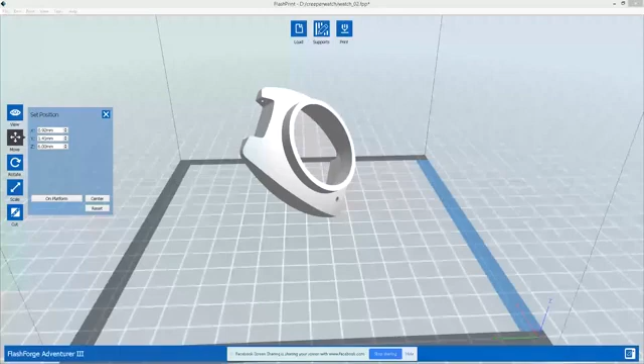All right, so I've got two models that I want to demo today on making supports. One of them is this watch face from Tiffany, and the other one is a Han Solo bust from Helios. So we'll do this one first. The watch face is pretty simple. The program I'm in at the moment is FlashPrint, and I've done heaps of streams and tutorials on this program already. So if you just click on my name in the Facebook group, you should be able to see the past stream recordings.

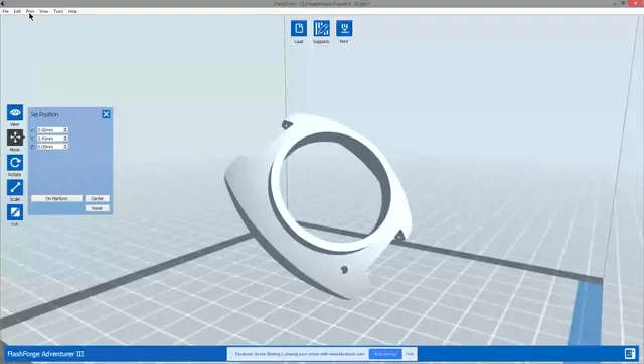But yeah, so I've already spent 5 minutes just looking at the model and then just doing the orientation. So this is what I came up with. But to get to that, I'm just going to load the model and then I'll just move that one out of the way.

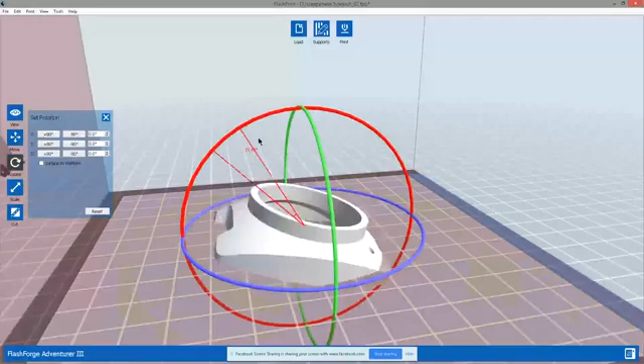All right, so in FlashPrint, there's a few really good features that will show you visually things you need to be aware of. So the first thing, obviously, is steep overhangs. So you see this red part on the model, that's basically telling you it's over the overhang threshold, which means you'll need to add supports. And you can change the, it's called the steep overhang in the view section. And you can set the angle that you want it to display. So set it to 45.

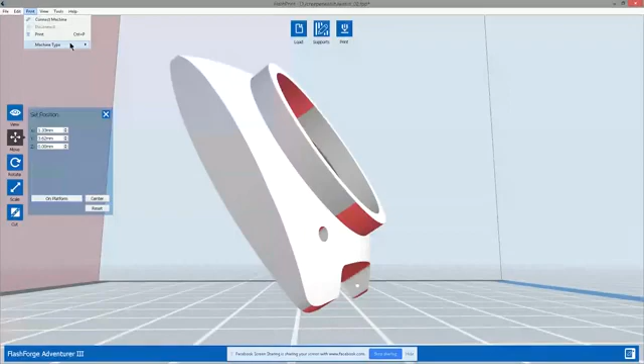So I found, on the Photon anyway, if you're printing a model that's sort of growing by itself without too many islands, a 60-degree setting works quite well. So when you're orientating your print as well, you want to basically grow the model from itself. So right now at this point, the model is going to grow from these two areas, and somehow it needs to sort of join up perfectly. So if it doesn't, then you'll get misprints.

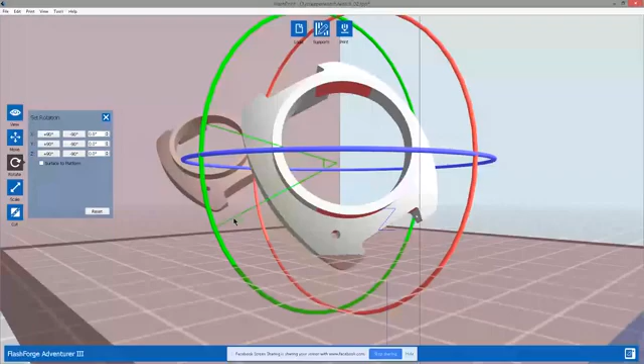Whereas if we just simply rotate it like this, it's just going to have the one contact point to grow from. Just makes things a bit easier. Obviously, you're still going to have islands here that will need to match up, but yeah, that's just the way printing works. But to minimize the problem of failed prints, it's best just to grow from a single point. So I'm going to delete this one and then bring this one back.

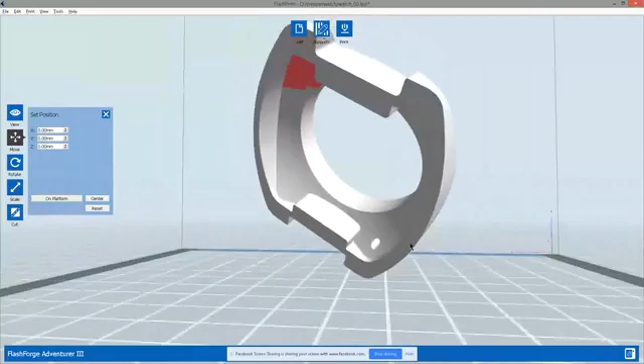So you can see in here, there's pretty much no overhangs that are over 60 degrees besides this area, which is pretty awesome because that means you won't need a whole bunch of supports all around the perimeter. So whether you do your supports in FlashPrint or some other program, the orientation of this model will still work. But I'm just going to do the supports in FlashPrint. And I'm using tree support. And I've got the overhang angle set to 60 like the preview. You can set it to something lower if you want. Let's do 55 just in case.

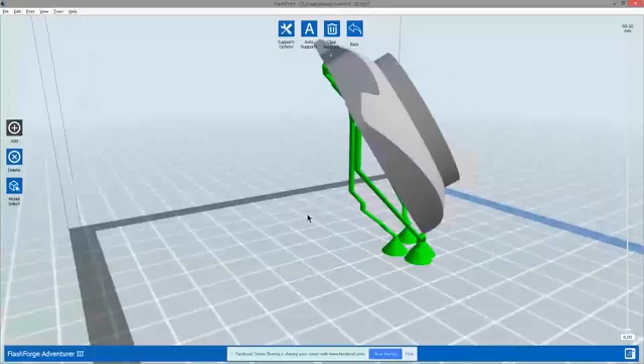Now you'll notice here the base height is set to 4 millimeter, which means we want to move the model up in the Z. So 6 millimeter, so a 2 millimeter gap works. I'm going to hit auto support. So yeah, that's with the tree-like auto support. It's not too bad, but there's a couple of things we can do to just mitigate any sort of weird printing issues, such as the supports snapping off around here. So the angle is just a little bit too steep.

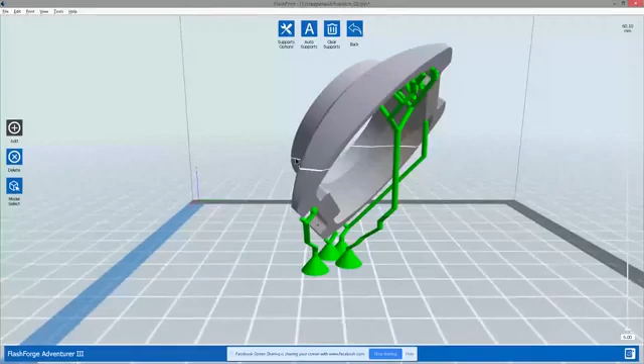What FlashPrint likes to do is put the base from a single point, just like I explained with the orientation. It just helps with the printing, but in this case, or in most cases, you'll want to just add a bit more structure to these. So you can see it's also added in these tiny little supports here, which should be fairly easy to dig out, but for this particular print, you won't need it. It's such a small area, it should just build on itself fine.

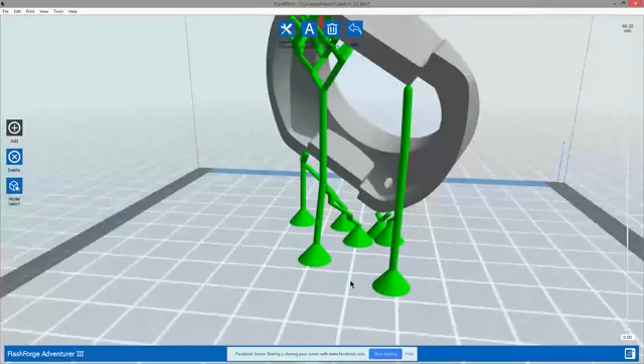So I'm just going to add a few more manual supports, going to the base. And you want these to be as straight as possible. So it may take a few tries. Now, obviously, if you look at this whole section up the top, it's going to be dependent on these supports working. And these supports all depend on this one single branch support. So that's a big no-no, because if this branch fails in any way, then all this up here is not going to print. So we'll just want to add a few more. And try and make it straight if you can.

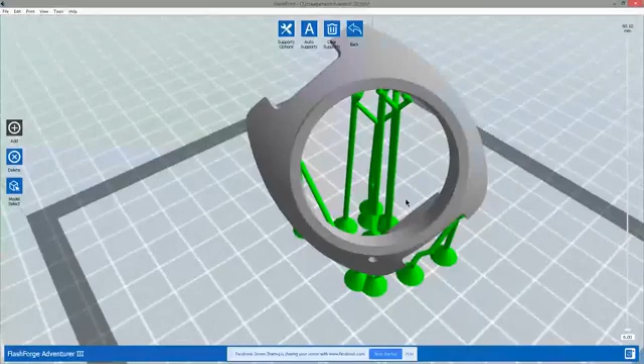So I should mention FlashPrint is a free program which you can download. Just Google FlashPrint. Yeah. Supports all the operating systems now, which is pretty good.

Hopefully the internet's not lagging too bad here in Australia. We're known to have really shit internet. You can see what I'm doing.

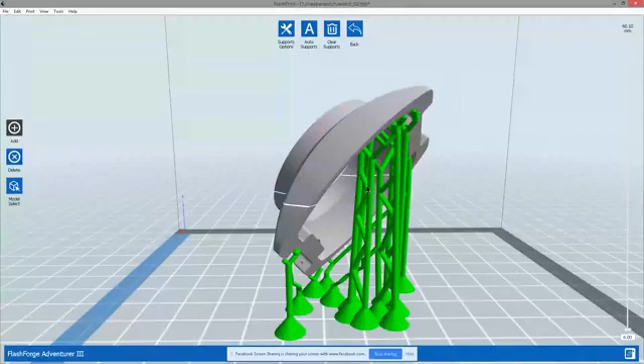So once you've added the extra sort of supporting supports, we can go in and manually add these struts to help the support even more. These are kind of fun. Just make sure that, you know, these critical supports here don't wobble or snap off. Just like building a high-rise. That's pretty good.

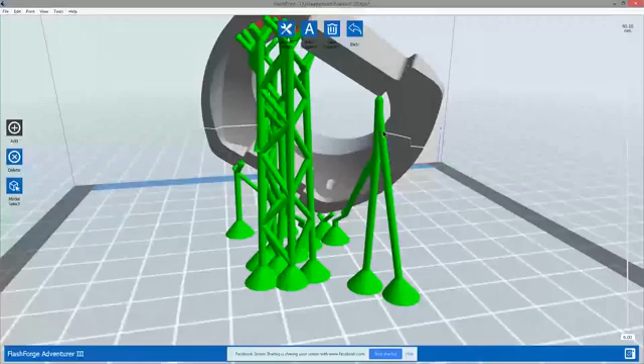So this little guy here should be okay, but once again, you're depending on this main structure to work. So let's just do this. Yep, that's fine. And you can see I can, you know, go in and delete and Control Z and undo and all of the normal stuff that a program should have.

No, it's probably not you, Tiffany. It's probably my internet here. The hamsters are running really slow today.

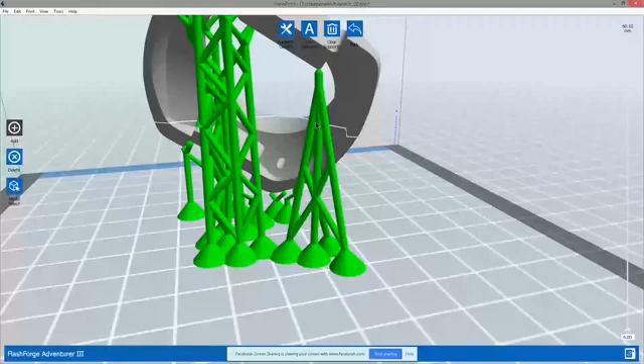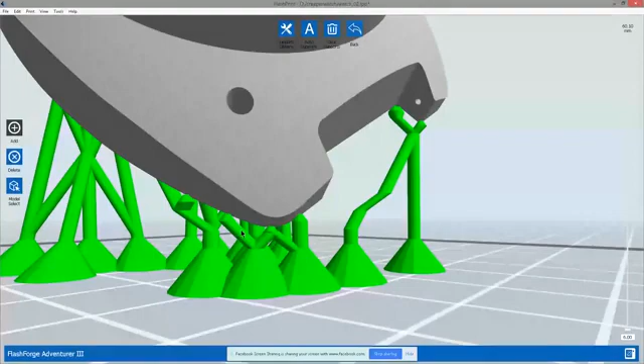Okay, so we get to the critical part where the entire print is going to be spawned from this section. So you want to make sure that this particular area is as well supported as possible. Just means though you will need to have additional cleanup just down in this corner. So try and avoid letting FlashPrint do harsh angles like this. It'll be fine, but if you can avoid it and give it extra support, then by all means do that.

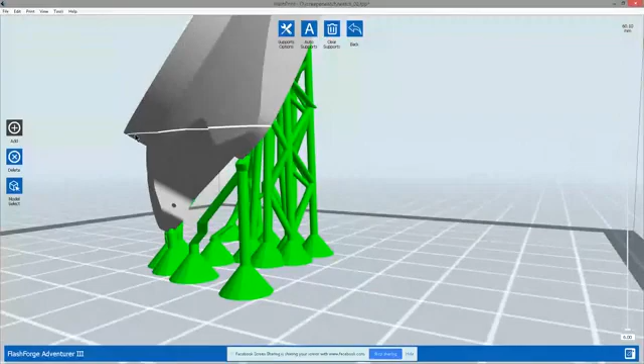It feels like I need to put in a support here. You can risk it and not have those. I think it's worth it. Again, same deal here. Just make sure that these are well supported.

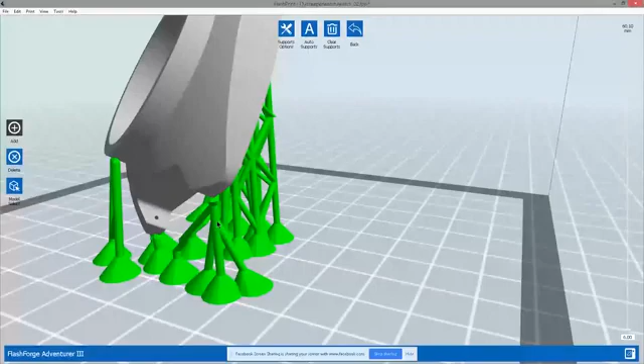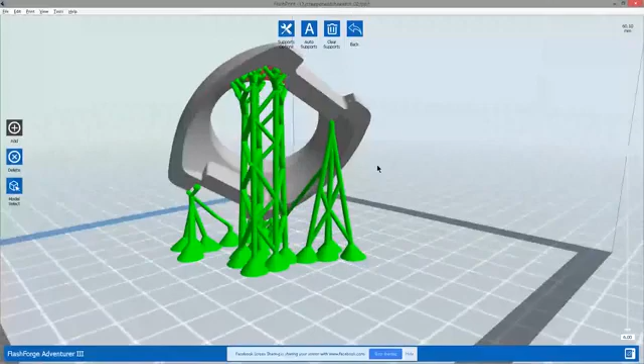So this whole section is obviously going to be dependent on this tiny little support here not failing in any way. So you want to make sure that, yeah, that's not going to fail. Give it a helping hand. I think that's looking pretty good. So one thing as well with FlashPrint, you can actually go in and do like a cross section as you normally would in like an FDM printer.

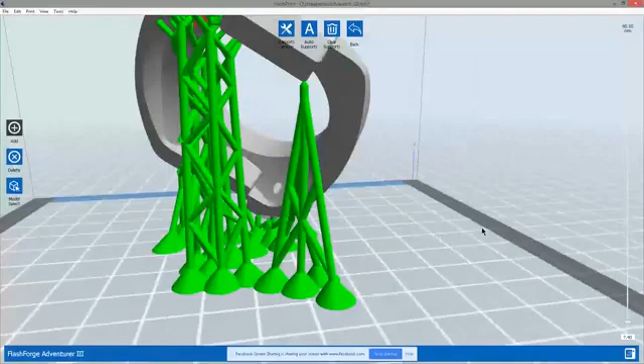I see Chitu are actually releasing a new version of the Anycubic Photon slicer, and that looks like it has a bunch of brand new functions and tools to help with supports. Looks really good, to be honest. So hopefully I won't need to use another program like FlashPrint to do supports anymore. Can't wait to try it out. Looks really good.

So I'm going to call this done. And then I'm going to send the file to you, Tiffany, and you can give it a try and tell me whether it works or not. I mean, it looks like it should print, right? So I'm going to slice this and then throw it into the Photon validator, and we'll just have a quick look. So let me just save this working project.

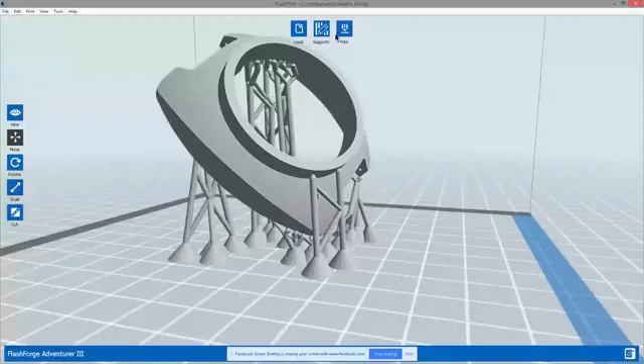So yeah, this is obviously the minimal support possible to get the file printed. If you want it to be more safe, you could add just supports like this. You don't obviously have to cover everything with supports, but even just one or two around the side will help. I'm just going to leave it at that for now.

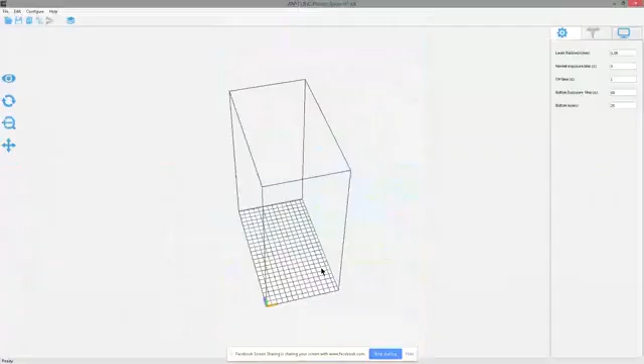And I'm going to save this out as STL. So you need to change the format down here to STL. Otherwise, you're just saving it as a FlashPrint project. That's fine. It's just saying it's going to bake in the supports to the model. So I'm going to slice this at 0.05, and you can change the exposure in the validator anyway, so I'll leave that part up to you.

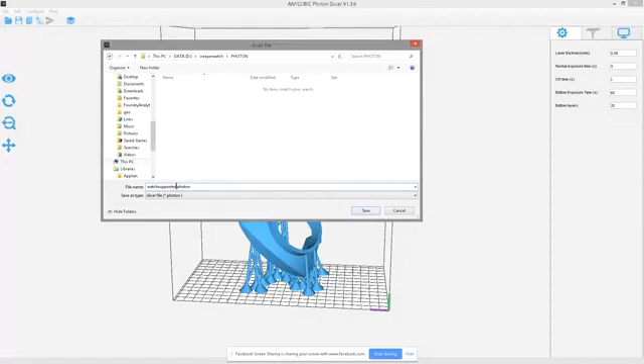I'll give it a quick once over. It looks fine. And just force of habit, I just remove any weird characters, underscores in my file name. Just use letters. So around 4 hours, the slicer is telling us, but we all know that's incorrect. So we need to bring that into the validator.

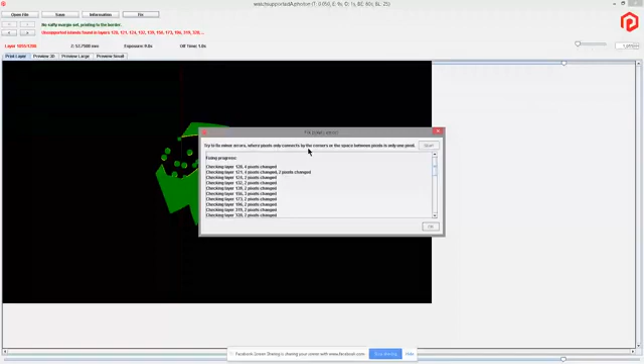Now, these single pixel errors aren't really going to affect your print that much. But hey, look at that. It's actually fixed everything. So no layers have islands. Job done. And let me just hide this. Scroll up. Always double check this before I save it and hit print just to make sure things are growing properly.

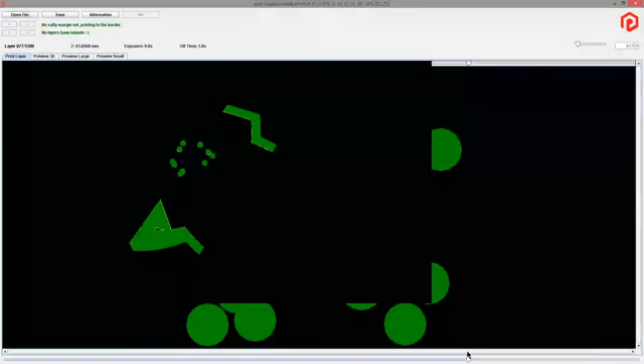Not sure what this hole is. It's weird. What are these holes here? I didn't see them in the model. Ah, these things. Alright. Did they go all the way through? Oh no, they just sit inside in the solid model. That should be fine. You will get sort of little suction vacuum issues, but the hole's so small, should be okay.

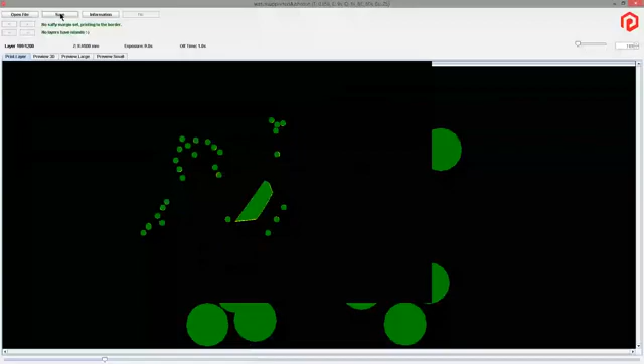So that's all good. So I'm going to save the file. I'm going to call this fixed. And Tiffany, I will upload this for you, and you can use a validator to change the exposure time to whatever your resin's using, and just resave it. It should be good to go. Let us know how it goes after the printing. Hopefully it all goes well.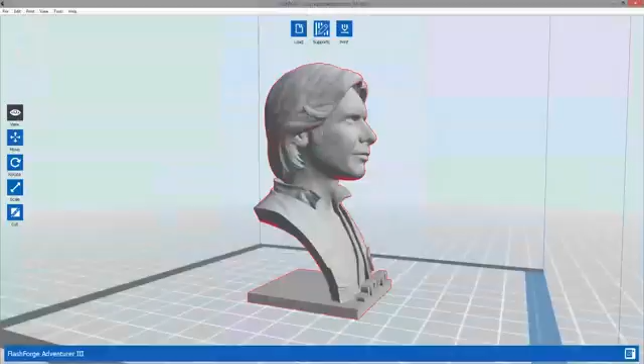So the model is not hollow. I don't have time to. Well, do I have time to do the hollowing? Let's have a look. We'll see how complicated it is. So I'm using Meshmixer for my hollowing and keying. All right, Helios, this one's for you, buddy.

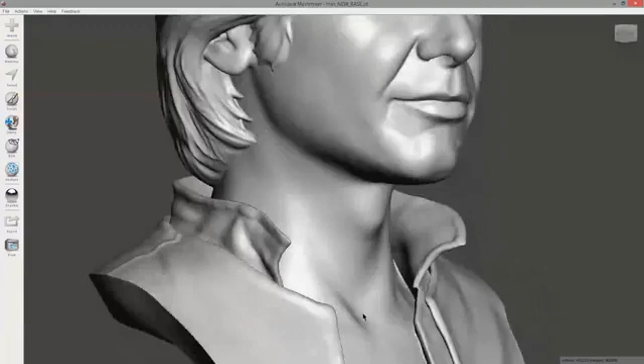Yeah, so just looking at the model, these tiny little overhangs inside are going to cause issues with printing. So it's a nice model, but it definitely hasn't been sculpted for optimal printing. So you probably just want the little gaps in there to be half of that, and then the rest is just a solid model. So we're going to have difficulties hollowing this, I would say, but let's have a look.

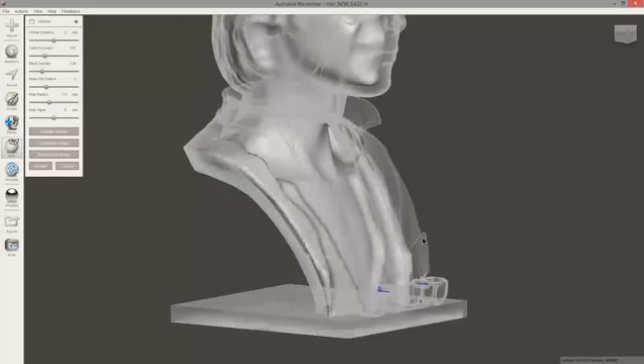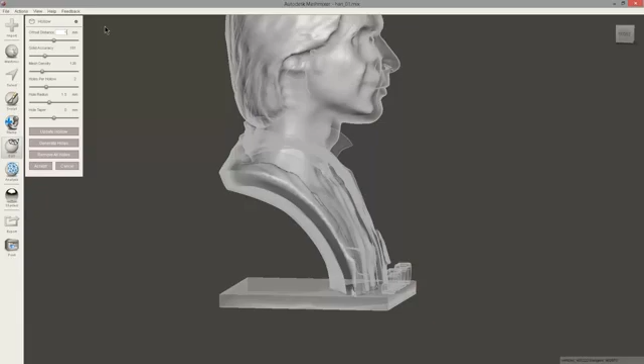Yeah, so it's already picked up some errors in here. So first things first, let me just run a quick model inspector. Let's see if we can fix these little errors. It's done a pretty good job. Excellent. So it looks like the vertices weren't merged together on those particular parts. Alright, so edit and then hollow. I'm going to set the offset, which is the thickness, to 1.5 mils.

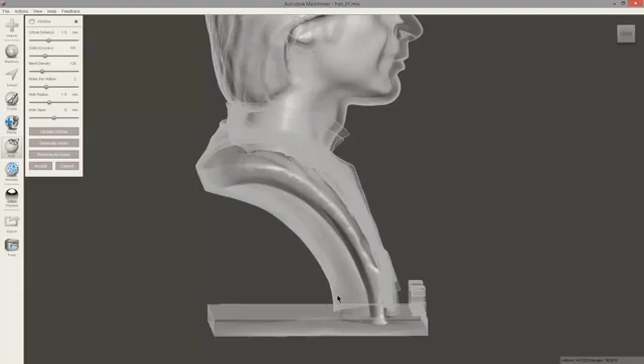So that's not too bad, but with this particular model, if we hollow out this particular section here of the base, it's going to create some bad suctioning, and I don't want to put holes down the bottom here for venting. So this is going to be quite advanced, but what I'm going to do is just save this hollow, split it out, and then cut the inner hollow to just above the neck, so we just get a hollow section for the head.

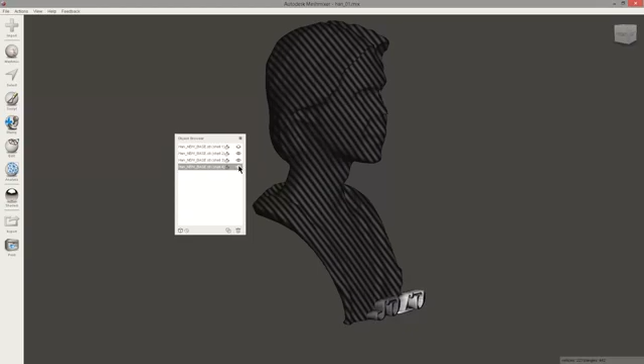Yeah, okay, so these words are separate. They haven't been modeled into the bust. So what I'm going to do for you, buddy, I am going to not print these words out just to make sure that your print is going to work properly.

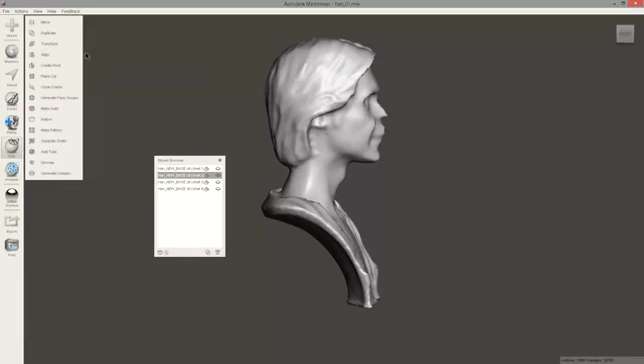So we're looking at the inner part of the model, and it's got the stripy texture to it. It's because the normals are flipped. So if you want to work on the model, you need to make sure you flip the normals. And that's all good. Okay, so what I'm going to do is now slice this. But yeah, you've picked a model that's pretty sort of tricky to print here, Helios. But that's fine.

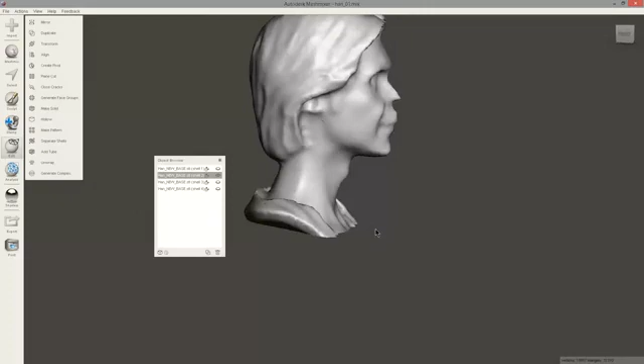Now what I'm going to do next is just smooth out some of these weird overhangs and cavities, just to make sure no resin gets trapped inside. When you're doing this, be careful that you're only pushing in, deflating the model, and not inflating the model, which will make the walls too thin. So that's why I use a 1.5 mil thickness.

These programs aren't 100% accurate, so anything lower than a 1 mil thickness of the walls and you start running into issues. So again, just pushing these in by smoothing them out, just so there's no weird overhangs.

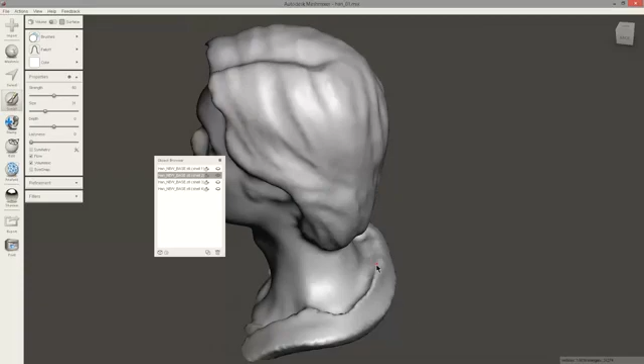You don't have to do this, but it's just me wanting to make sure that things print out properly. And look, if you spend your time doing all this stuff, you don't end up wasting a bunch of resin, and your prints come out nice the first time. So that's all right. Just gonna run the mesh inspector again. Just make sure there's no weird holes in this. Okay.

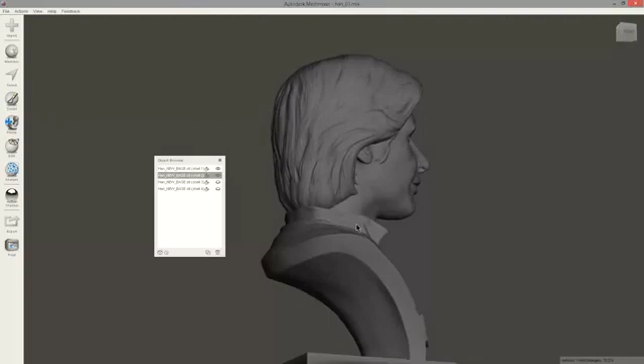Okay, so this is the inside, and then we've got the outside. So the next thing I need to do, the critical part, is to add a vent hole for air to go in as the printer prints this top section. Without that vent hole, you'll have just a vacuum inside the volume here, which is going to cause you all sorts of problems.

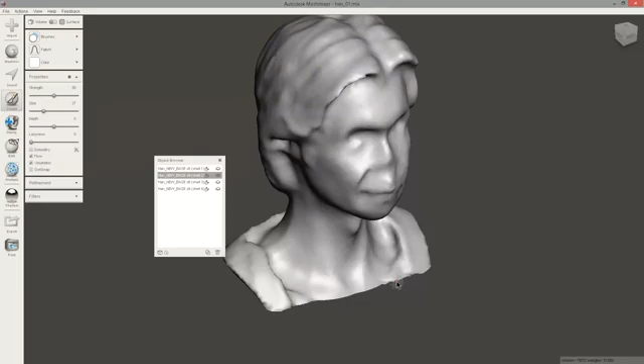And actually I might just smooth this out, sorry. Not really a fan of what's going on here. Should be alright, I guess. It's on the inside, so I just want to give it some thickness. There we go, it's a bit better.

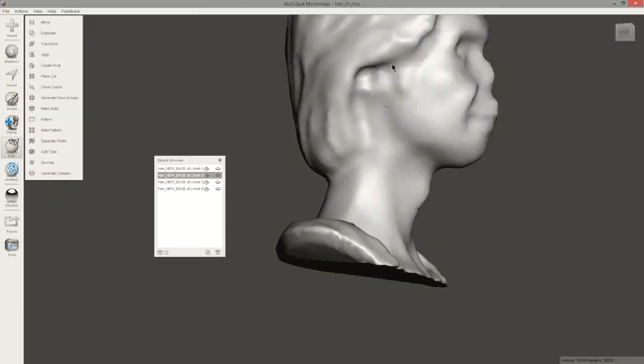Okay, so what I'm going to do now is to add a vent hole and then merge it into the inner part, and then subtract the entire inner part from the outside part, which will make a cavity inside the model with the vent hole as well. So in here, there's some generic primitive shapes, and the cylinder works quite well as a vent hole. So we'll just drag and drop that into this section.

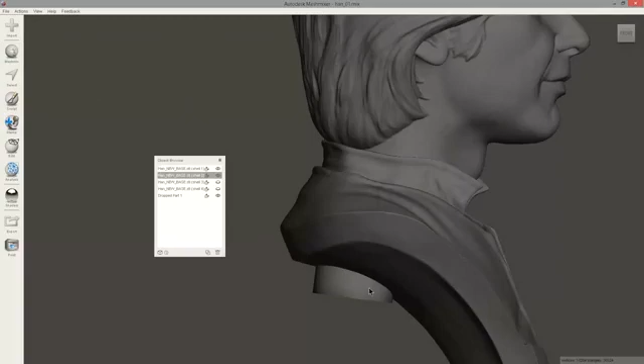You want to make sure that the part isn't going through the model like that, and you also want to make sure that it is long enough that it cuts out through the actual front side of the model as well. So we're essentially cutting out this section from the outside. Hopefully that kind of makes sense.

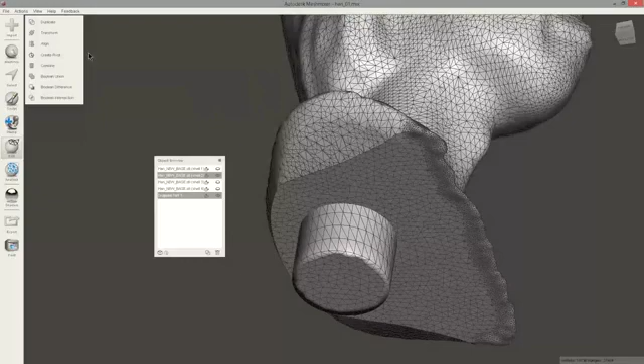But before we can do that, we need to combine these two. So the cylinder is an object by itself along with the inner part. So we want to do a Boolean union to combine those. And if I press W, you can see the wireframe of the model. So just select these two and then go Boolean union, and you'll see it's actually combined these two pieces into one single piece.

I untick auto reduce results and then use intersection curve. Just gives a neater, more accurate Boolean. Hit accept. So now this is actually one single piece of geometry. So now we can go and subtract this from the outside. Just gonna save it before I do the Boolean. So this part gets pretty computationally heavy. Sometimes it can crash. So just save your work before doing that.

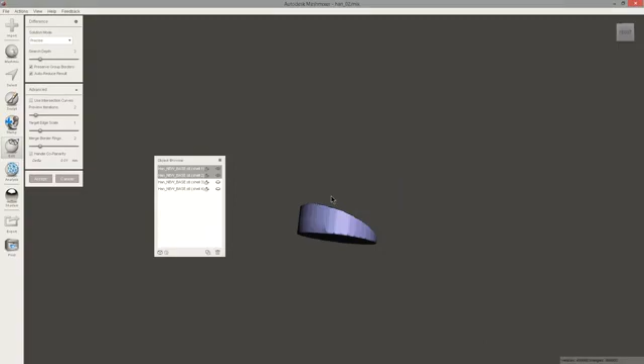And I select the inner and then select the outer. Shift select, and then do a Boolean difference. And I have selected the parts in the wrong order, so it's done the reverse, so that's fine. Just hit cancel. So select the outer part first, and then shift select the inner part. There we go.

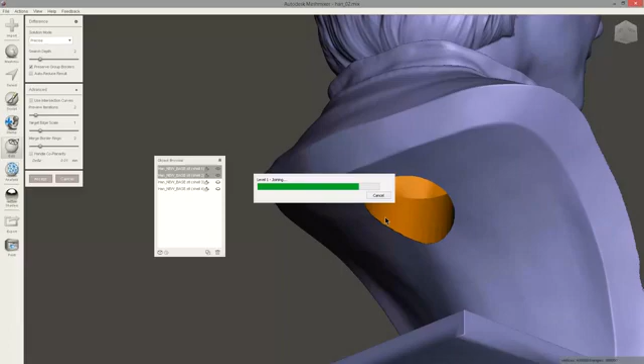So now we have a perfect cavity that's roughly 1.5 mil thick with a nice big drain hole down here for air to get in there. Now these settings, once again, untick auto reduce results and then use intersection curves. And you'll see these edges are now much cleaner, much more accurate. If I toggle on wireframe, you can see the inner part is joined with the outer part with a vent hole. Accept.

Okay, so now we have a watertight mesh that is hollowed with a vent hole. So we'll save this out as an STL, and then we'll bring that into FlashPrint for supports.

So back in FlashPrint, I just load the model. Han Solo.

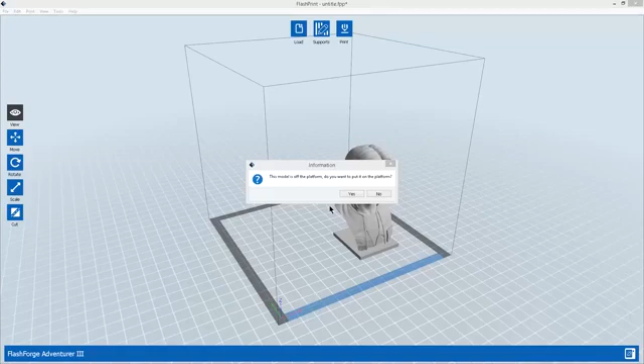Oh man, Johnson Yee, sorry dude, I'm terrible at reading Chinese, and the in chat it doesn't let me use the translation. I'll have to check your question later. Sorry, mate.

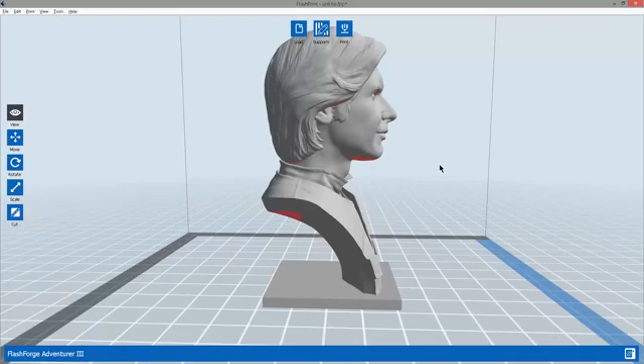Okay, so this is a hollow model. Just double check it. Yep. And then we can do the cross section in here as well, just to check it. Yeah, that's all hollow. So this one, let me think. You could print it flat and just have the supports going down here, down the chin, down there. But let's try it on angle.

So once again, if you pay attention to the overhang angle indicator in red, it's going to tell you which section will need support. So just rotate it until most of it is gone. You can have some, but look at that. So just by simply rotating it, we've basically removed the need to add supports to the chin. Now it's going to print without any supports.

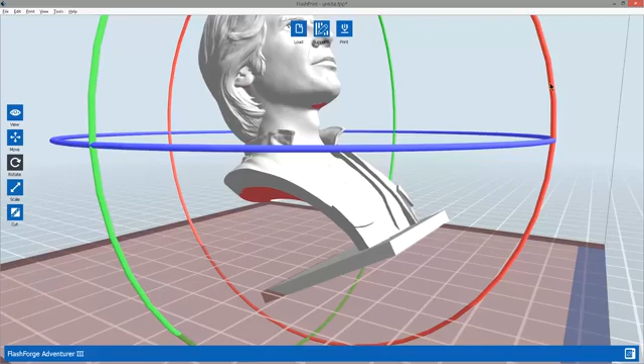But one thing to be aware of is when we are doing that, you'll be adding overhangs in this section here. So the angle is going to get steeper here. So you need to find a happy balance. And if we need to have one or two supports in the chin, so be it. But you want to try and avoid supports in the details, right? So no supports in the eyes or on the face.

And obviously there's going to be a shit ton of supports down here, which is fine. It's in the back and it's nice and flat, which you can easily sand without any issues.

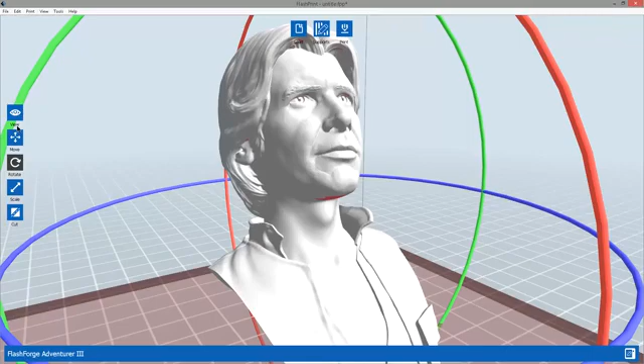And I'm also going to turn on the island indicator or show model outline. Oop, not that one, sorry. Yeah, so if you go into supports, you have this island checker outline thing, which you also have in the Photon and other programs. So it's just a good way to check for islands.

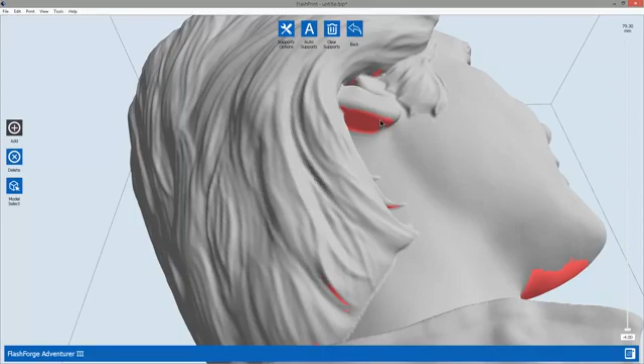And we'll probably need supports just underneath the ears here. Hopefully everybody knows what an island is, but you'll see that the ears are growing from this tip here, this section, which means you'll definitely need supports. Otherwise it might print out flat. Otherwise it's not too bad. Should be okay. So let's stick with this orientation.

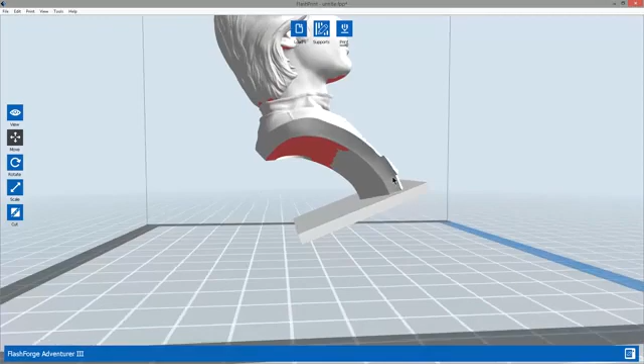But I will need to move the model up so it's not penetrating into the floor. And then I'm gonna hit center and then move it up another 6mm, so we have enough room for supports down the bottom. Alrighty, so once again, go into supports and you can check the options here using 55°, using tree-like supports. So for models that have fine detail, I like to use thinner supports, 1.4. We'll just see how that goes.

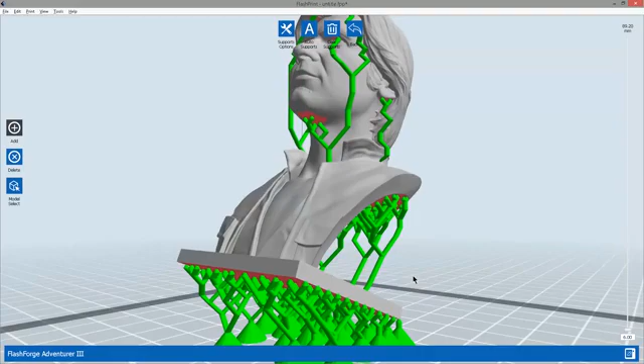Yeah, it looks pretty good. So straight off the bat, it's done a pretty good job from what I can see. So obviously, you're going to have to deal with these supports in the cleanup process, but it's just a flat surface. So just sand the shit out of it and you'll be fine. It's not a deal breaker. And these supports in the back, again, easy to sand. Can't see it, who cares?

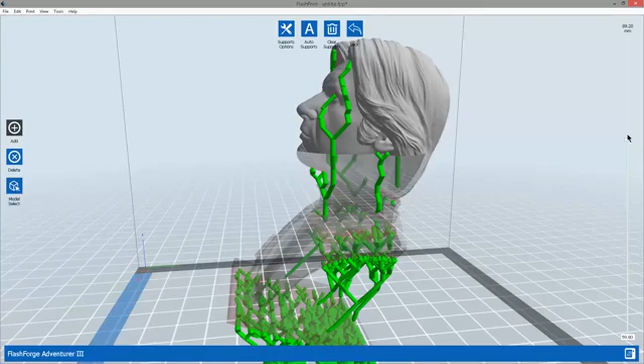So let's just check out the inside and see what sort of internal supports it's done. Yeah, cool. So it supported the overhangs on the inside. The reason why you need supports on the inside of a hollow model is so it doesn't end up collapsing on itself. The inside of the model will also suffer from overhangs and islands and stuff like that. So if you don't support these, you'll end up getting bits of resin stuck on the FEP, which is just going to cause you printing errors further on down the print.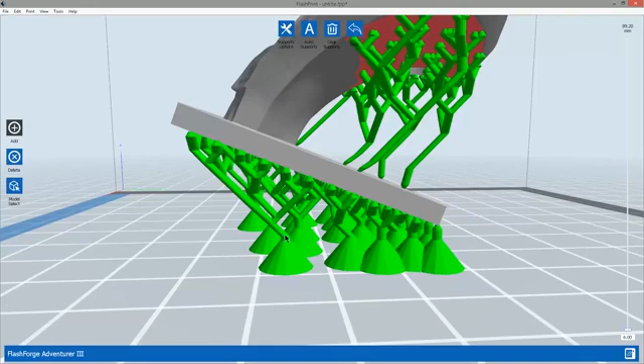So I always leave internal supports on. I haven't had to add or modify any internal supports. They've generally been all pretty good. But what you will need to do is go in and then add supports, as in my previous example, to give it more structure, and then less of these really long, harsh angles here. You just need to go in and just make sure that these come straight down.

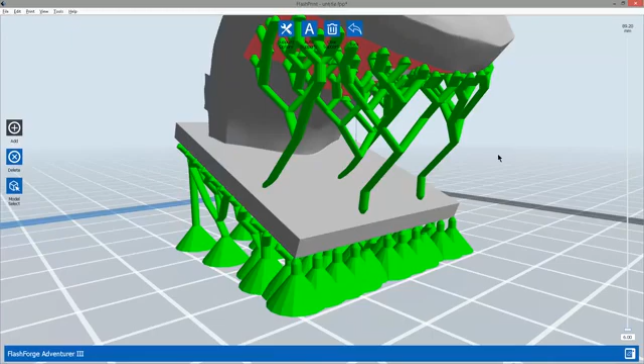So buddy, I am not going to do all these additional supports for you. You can do them yourself. Just go and download FlashPrint, and I will save this project for you, so you can just load up the project and then just add the extra supports in there. So you need to do this, and then don't forget to add the cross beams afterwards. That.

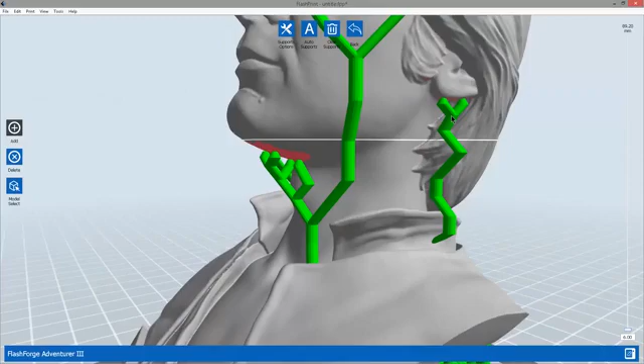Now, regarding these supports on the ears, they're not too bad. I would just leave them, maybe. I mean, that's some crazy angle it's decided to use. So maybe just do this. There you go. Do this.

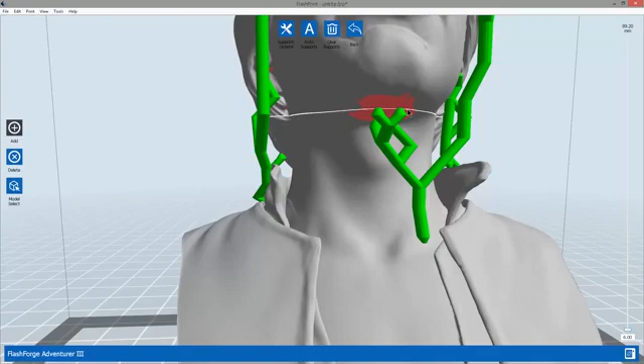So pay attention here how it's only just got one main support down the bottom here. If anything happens to this particular point and the support breaks off, then you'll have problems going all the way up here. So just add another support down here. So if this one breaks, at least you'll have this one to take over.

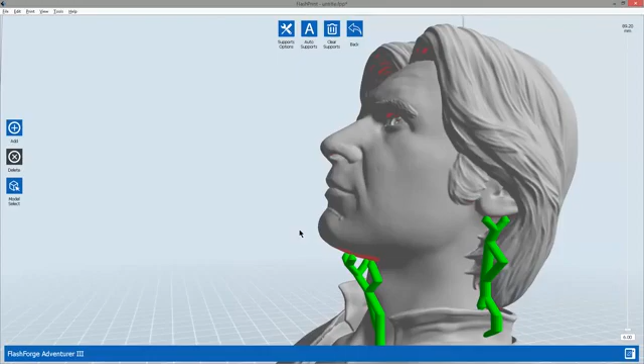This crazy stuff up here, you won't need it. Gotta delete it. The Photon will print those just fine. I mean, it's such a small contact area. Even if it doesn't print out exactly as it is, you won't notice it. So you can go through and delete these or leave them. I don't think they will matter too much. You won't be able to see it anyway, so just leave it in there.

Okay, so I am going to bail. You guys have any questions in chat that I can quickly answer for you?

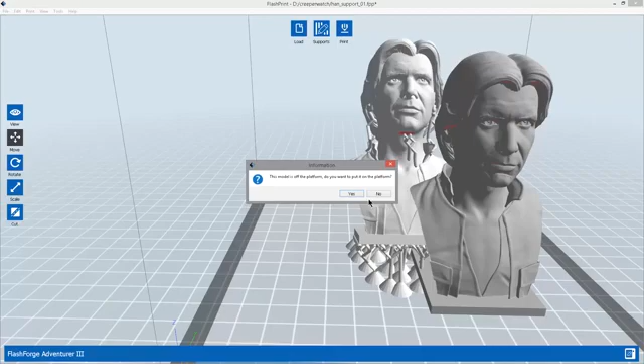So let's have a look and see if we were to print this flat, what support it would have done. And I think you're going to be surprised at how many supports will end up on his face, which is definitely not what you want. So what I'm doing, just leaving it as it is, printing flat on the base, and then doing auto supports. We'll see what it comes up with.

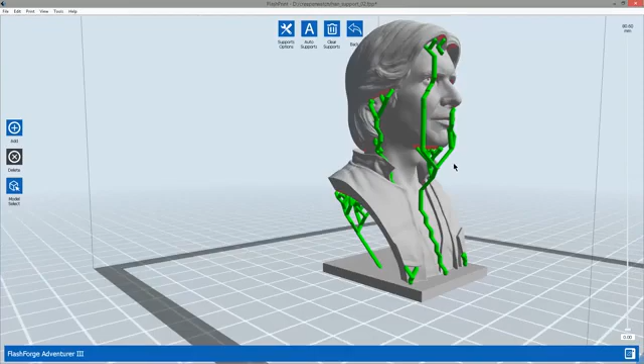So it actually hasn't done too bad of a job. I thought it would have added supports here on the eyes, covered the whole face up with supports, but that's actually not too bad. That's actually using less supports than the angled version. So yeah, I'll leave it up to you, Helios, on how you want to print this guy. Might print fine with just sitting flat on the base. You might just have a hard time trying to scrape this base off the build plate. But yeah, this might work.

But obviously with stuff like this, you still need to make sure that they all go straight down. Johnson, thinner support. Sorry, you've actually put in the translation in there. I apologize, didn't see those.

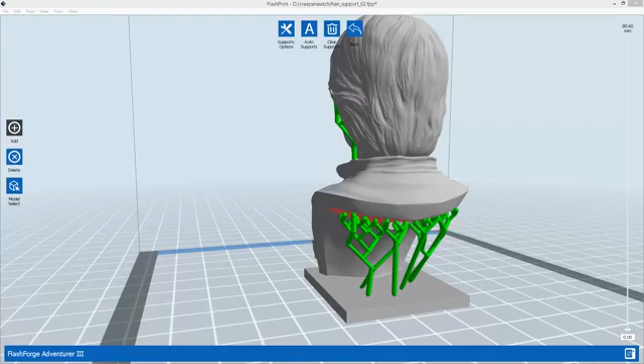Angled or flat? Well, it's up to you, man. I think it should print fine flat. You just have a little bit more supports to remove on the face. I'll leave that up to you. You can do both and get back to me and tell us which one worked better.

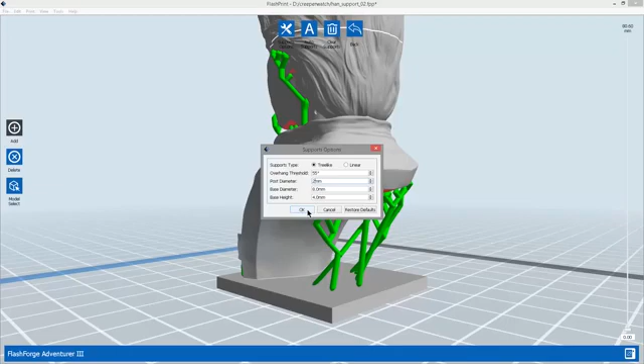So, Johnson asked, there are 3 hair supports behind the neck. Do you have a better way to set thinner support? Well, with FlashPrint, you can manually set the additional supports to the thickness that you want. So at the moment it's set to 1.4 mil. If I set this to 2 just for demonstration, and then add new supports, so you can add new supports that are different thickness.

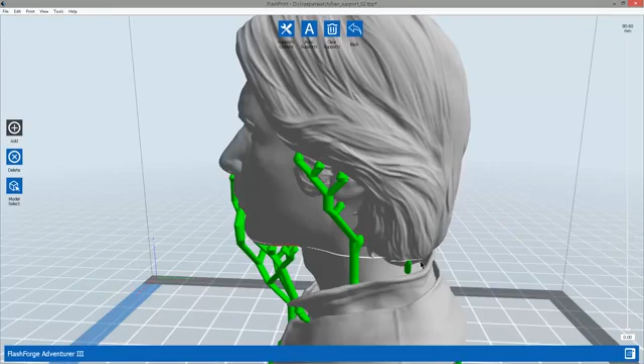That's fine, but you can't modify existing auto supports or existing supports afterwards. So I can't go in here and then try and select this and change the thickness. Doesn't really work like that. So yeah, you can add in supports there. But this is 1 mil supports. It's nice and thin.

So that's it, guys. Hopefully it helped. It's always better to demonstrate things with your own model that you've been struggling with. So that's why I've decided to demonstrate this with 2 models from members on the group. I might do more of these in the future. So if you have a print that you've tried quite a few times to support without success, give me a shout. And I might do a few of these in a row